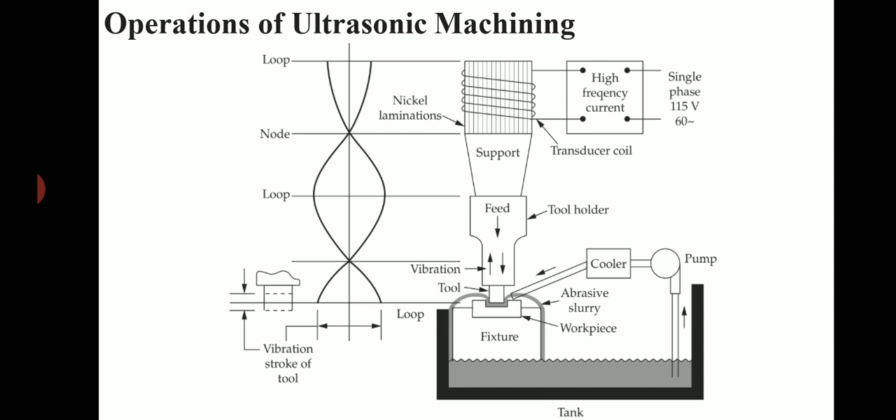Operations of ultrasonic machining. It comprises of tool, abrasive slurry, workpiece, pump, cooler, support, feed, tool holder, high frequency current of single phase of 115 volts, transducer coil, and nickel laminations.

Ultrasonic machining is an economical process by which we can produce cavity or hole in the hard and brittle materials. The sequence of operation is given below. Electrical supply is given to high frequency generator. High frequency generator creates an alternating magnetic field which expands and contracts the stack made of magnetostrictive material transducer. To get maximum magnetostriction, high frequency AC current is superimposed with DC pre-magnetizing current.

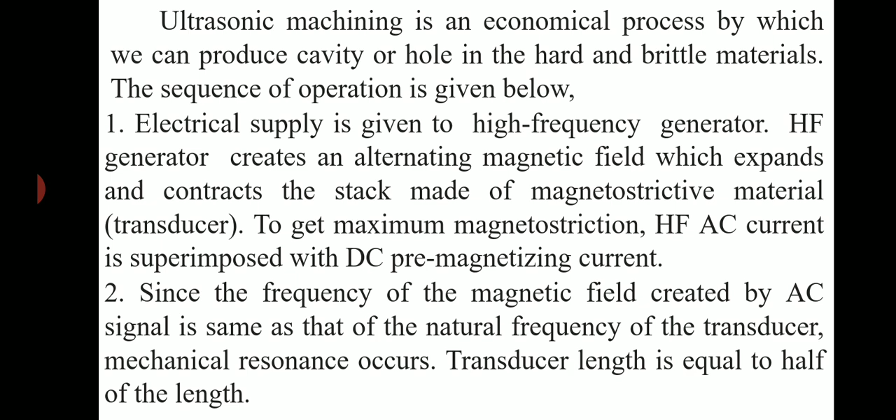Since the frequency of the magnetic field created by AC signal is same as that of the natural frequency of the transducer, mechanical resonance occurs. Transducer length is equal to half of the length. Oscillation of amplitude obtained from the transducer is about 5 microns, which is very small for metal removal. Therefore, it is amplified to 40 to 50 microns by fitting amplifiers into the output end of the transducer.

Acoustic horn transmits the mechanical energy to the tool and concentrates power on small machining area. The tool is fed into the workpiece by an automatic feed mechanism. It has a provision for measurement of static pressure exerted by the tool and penetration depth measurement. Abrasive slurry under pressure is supplied to the working gap between the tool and the workpiece by a centrifugal pump. Abrasive particles are hammered by the tool into the workpiece surface and they abrade the workpiece into the conjugate image of the tool form.

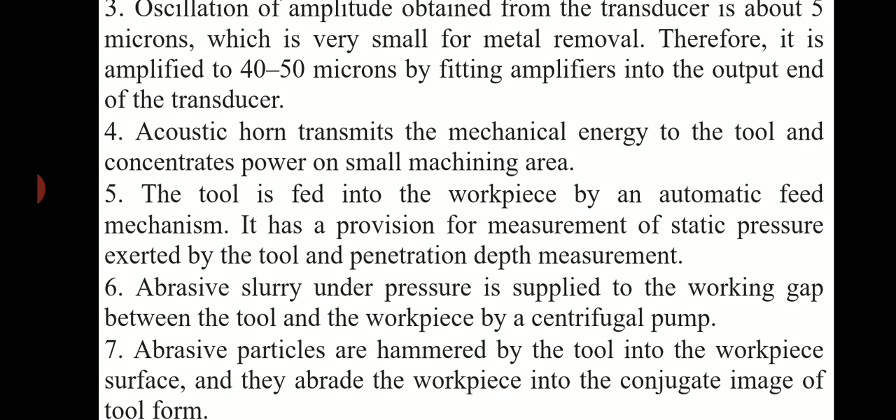Tool feed mechanism. The feed mechanism of an ultrasonic machine must perform the following functions. Bring the tool slowly to the workpiece to prevent breaking. The tool must provide adequate cutting force and sustain it during the machining operation. The cutting force must be decreased when the specified depth is reached. Overrun a small distance to ensure the required hole size at the exit. The tool has to come back to its initial position after machining is done.

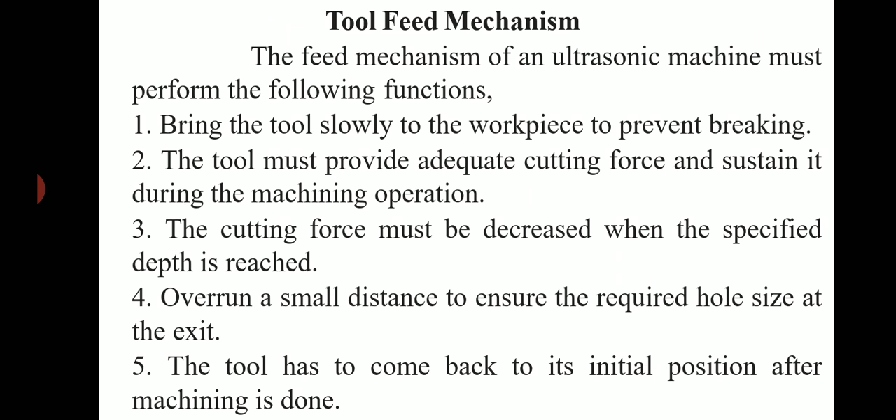There are 4 types of feed mechanisms which are commonly used in ultrasonic machining: gravity feed mechanism, spring-loaded feed mechanism, pneumatic or hydraulic feed mechanism, and motor-controlled feed mechanism.

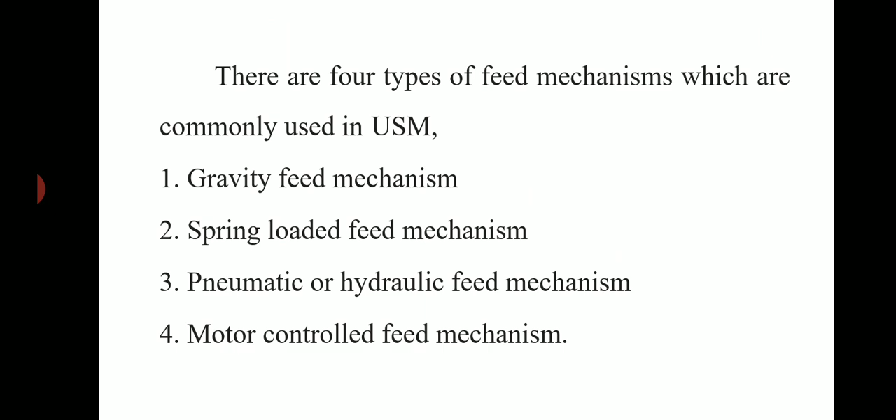Gravity feed mechanism. In this mechanism, counterbalance weights are used to apply the required load to the head through pulley and rope arrangement. In order to reduce friction, ball bearings are used. Gravity feed mechanisms are simple in construction, but this mechanism is insensitive and inconvenient to adjust. The 2 diagrams indicate counterweight with rope and pulley and counterweight with lever and fulcrum.

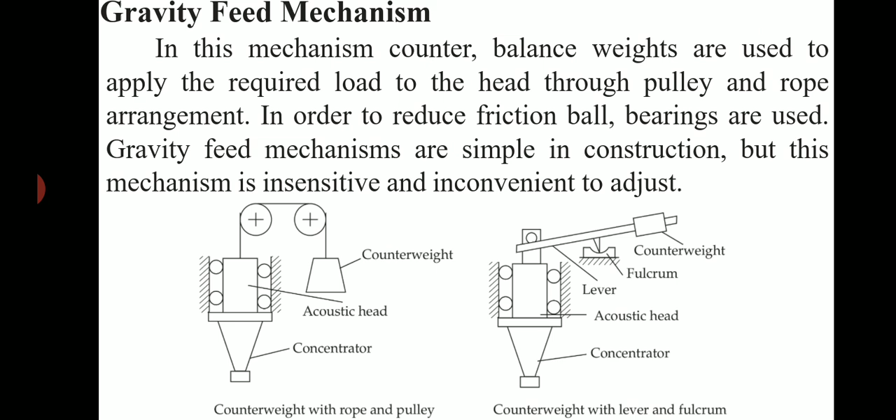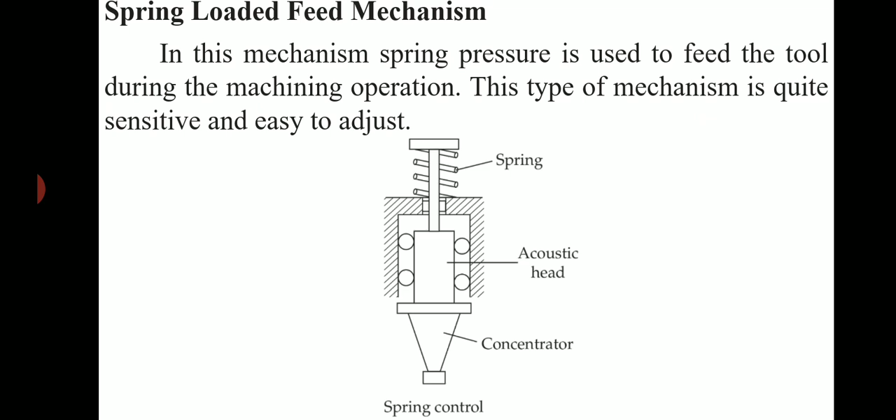Spring-loaded feed mechanism. In this mechanism, spring pressure is used to feed the tool during the machining operation. This type of mechanism is quite sensitive and easy to adjust. Pneumatic or hydraulic feed mechanism. In this mechanism, hydraulic cylinder is used to give a linear motion of the tool. High feed rate and accurate positioning are possible with hydraulic feed mechanism.